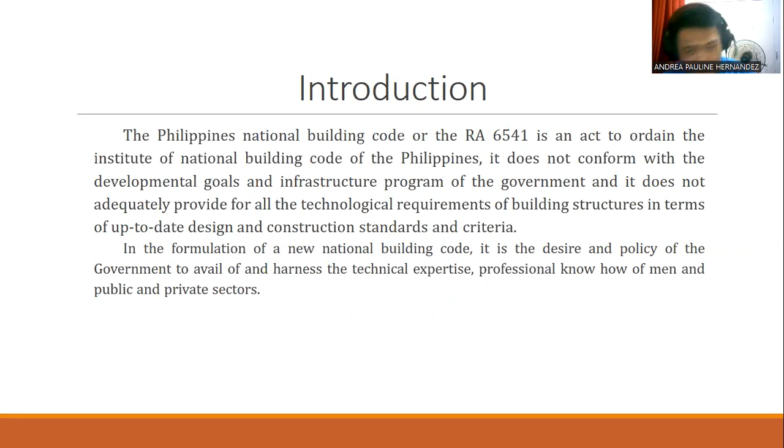First, general provisions on building requirements and site requirements. The general building requirements: all buildings, structures, as well as accessory facilities thereto, shall conform in all respects to the principles of safe construction and must be suited to the purpose for which they are designed.

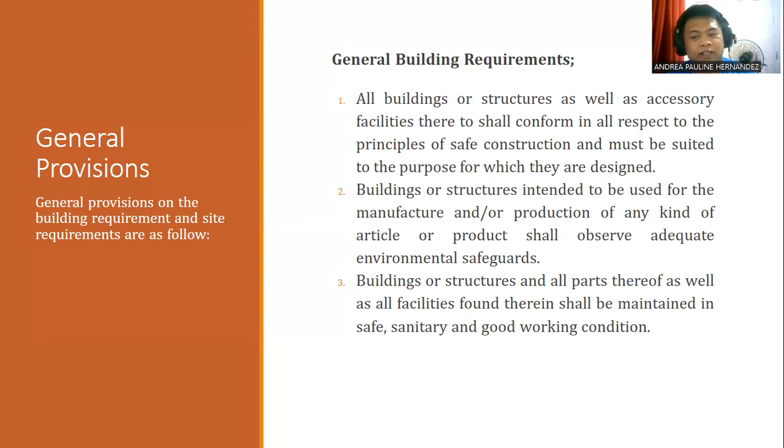Second, buildings or structures intended to be used for the manufacture and production of any kind of article or product shall observe adequate environmental safeguards. Third, buildings or structures, and all parts thereof, as well as all facilities therein, shall be maintained in a safe, sanitary, and good working condition.

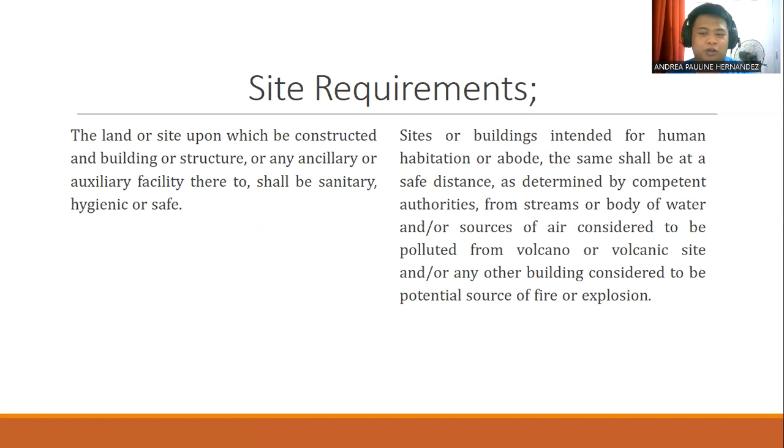Site requirements: the land or site upon which a building or structure, or any ancillary or auxiliary facilities thereto, will be constructed shall be sanitary, hygienic, and safe. Sites or buildings intended for human habitation or abode shall be at a safe distance, as determined by competent authorities, from streams or bodies of water or sources of air considered polluted, from volcanoes or volcanic sites, or from any other building considered a potential source of fire or explosion.

There are 5 types of construction. This will help the learner's understanding of the construction of buildings they see in public, and will also help them identify the materials used in building such infrastructures.

The first one, Type 1, shall be made of pure wood construction. Type 2 shall be wood construction with protective fire resistant materials, and one hour fire resistive throughout, except that permanent non-bearing partitions may use fire-retardant treated wood.

The third type shall be of masonry and wood construction. Structural elements may be any of the materials permitted. Exterior walls shall be of incombustible, fire resistive construction.

Type 4 shall be of steel, iron, concrete, or masonry construction, and walls, ceilings, and permanent partitions shall be of incombustible, fire resistive construction. Type 5 shall be 4-hour fire resistive throughout, and the structural elements shall be of steel, iron, concrete, masonry construction.

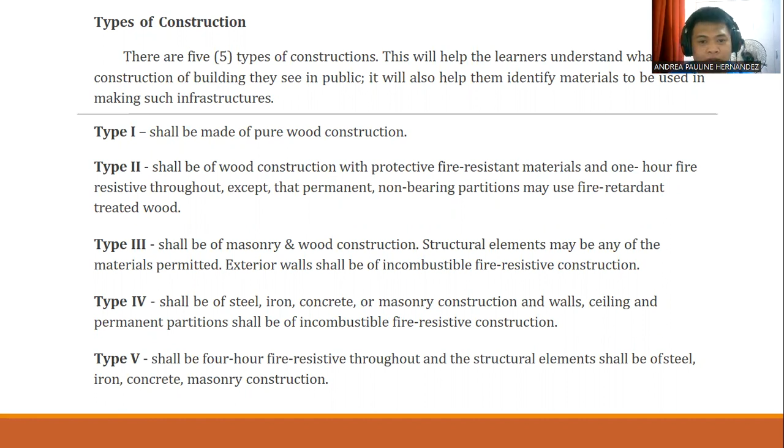Fire resistive requirements of construction. Knowing the fire resistance of different types of building construction will help managers determine what type of building is good for their businesses. This helps by lessening the risk of loss to the business and preventing this as well.

Materials used to construct a building have different fire resistive ratings. This is the degree to which a material can withstand fire, as determined by generally recognized and accepted testing methods. It's also important to understand the fire resistive time period rating, which is to prevent further loss to the business, since it measures the length of time a material can withstand being burned, for example 1 hour, 2 hours, or 4 hours.

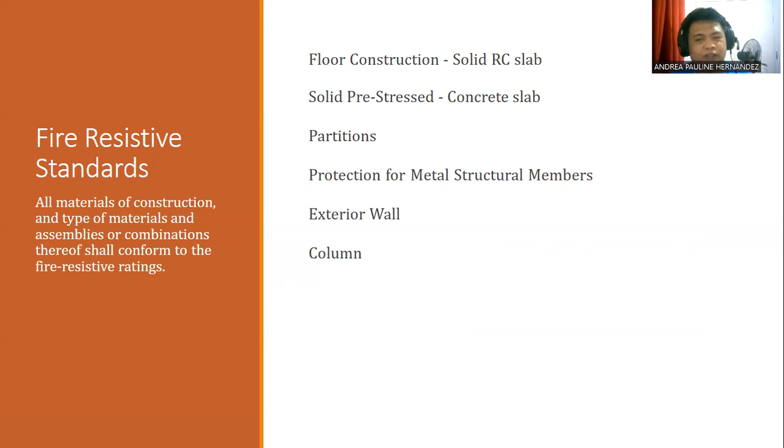Fire resistive standards: all materials of construction and types of materials, and assemblies or combinations thereof, shall conform to the fire resistive ratings. The first is floor construction, or a solid RC slab. The second is solid pre-stressed concrete slab. Then, the partition protection for metal structural members, exterior walls, and columns.

All existing openings on a firewall shall be sealed completely to maintain the fire integrity of the adjoining buildings or structures. There are exemptions based on the usage of the building, especially if it's used for ventilation. These are examples of substandard buildings that have not followed the minimum requirements for firewalls; you may see the difference between the first and second examples.

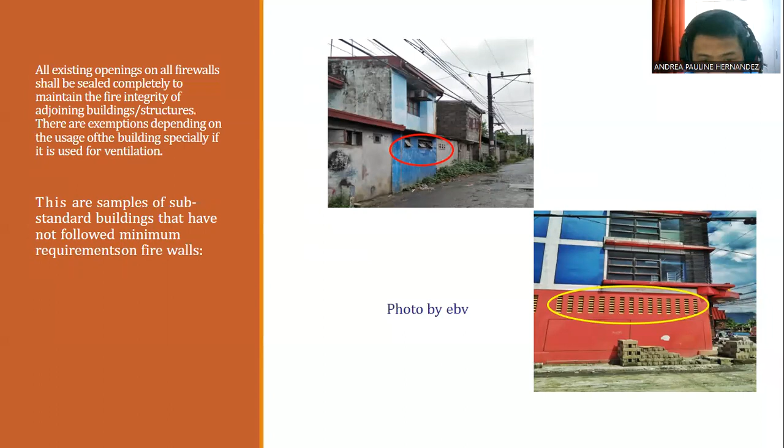Maximum building height: the maximum height and number of stories of a proposed building shall depend upon the character of use or occupancy and the type of construction, considering the following factors.

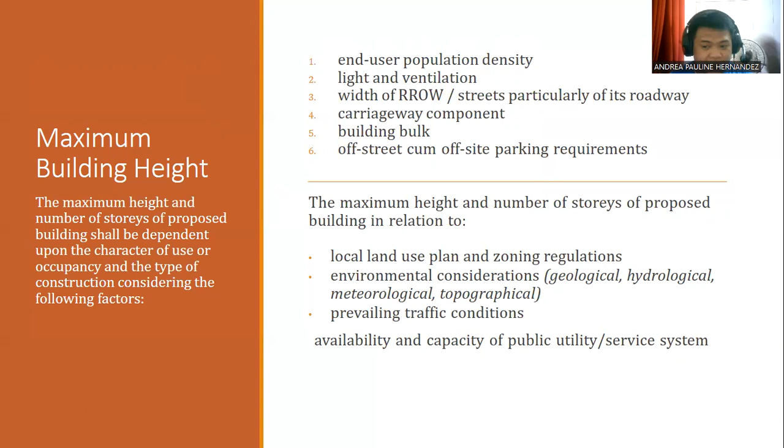First, end-user population density. Second, light and ventilation. Third, width of road right-of-way, streets, particularly roadways, carriageways, component building bulk, and off-street or off-site parking requirements. The maximum height and number of stories of a proposed building also relates to local land use plan zoning regulations, environmental considerations such as geological, hydrological, meteorological, or topographical factors, and lastly, prevailing traffic conditions and the availability and capacity of public utility service systems.

Determining of building heights. Building height limit or BHL is generally measured from the established grade line to the topmost portion of the proposed building or structure. The BHL of any proposed building structure shall only be as allowed under the NBC rule.

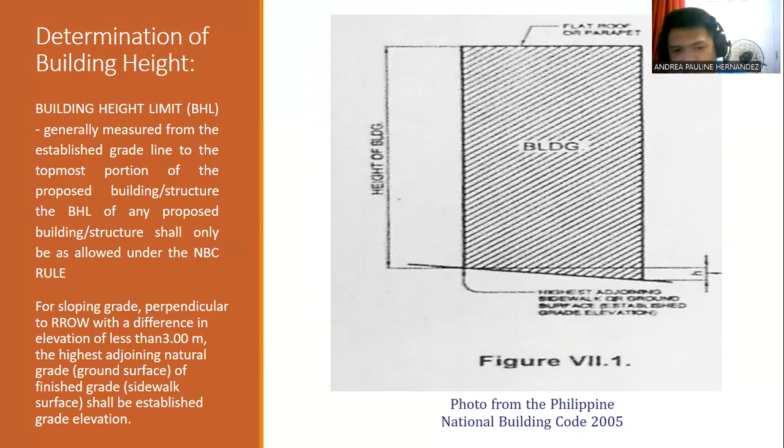For sloping grade perpendicular to the RROW with a difference in elevation of more than 3 meters, the average grade level shall be the established grade elevation. This is different, as you can see in the examples showing different and same levels.

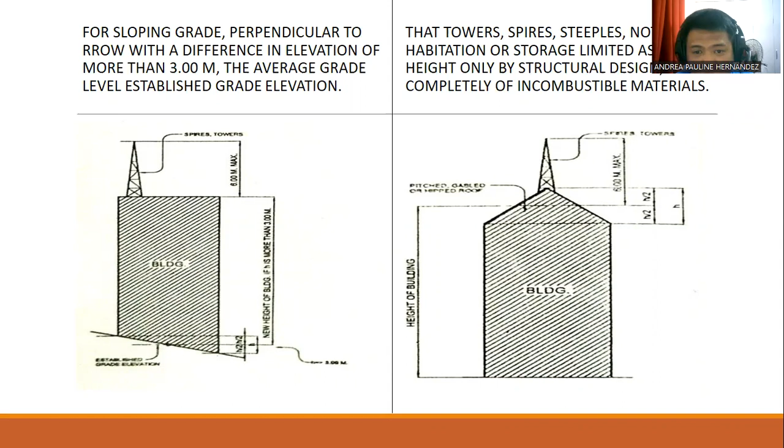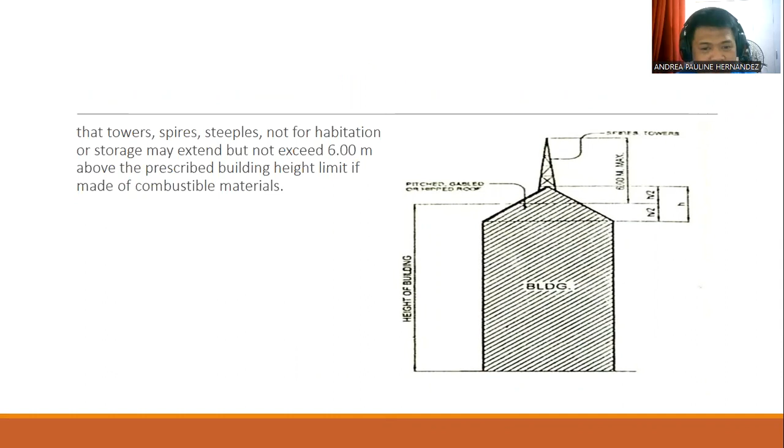The wording can be confusing. The tower's spire, steeple, or similar structure placed not for habitation or storage may extend but not exceed 6 meters above the prescribed building height limit, if made of combustible materials.

The height of proposed buildings or structures shall also be governed by the following RROW-based limitations. If only one RROW services a lot and such is only 6 to 7 meters wide, a BHL of 3 stories or 9 meters maximum shall be observed regardless of use or occupancy, lot size, and dimension, etc.

If only one RROW services a lot and such is only 4 to 5 meters wide, a BHL equivalent to 2.5 stories or 7.5 meters maximum shall be observed.

Fourth, if only one RROW services a lot and such is only 3 meters wide or less, a BHL equivalent to 2 stories or 6 meters maximum shall be observed. Taller buildings are allowed for duly approved high density developments such as a Planned Unit Development or PUD.

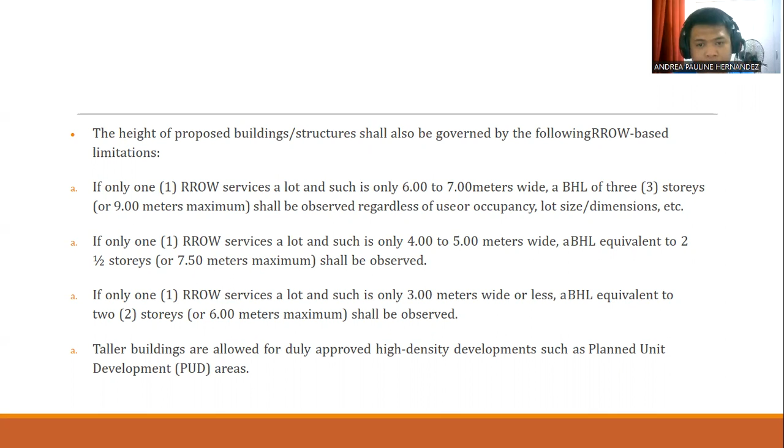The following factors shall also be considered in the determination of building height: A, soil characteristics, lot location in relation to fault lines and earthquake belts, or proximity to volcanoes and other geological conditions; B, hydrological conditions such as the water table at the site and distance to waterways and shorelines.

C, meteorological conditions such as the frequency and intensity of destructive typhoons, monsoons, winds, rains, prevailing wind speed and direction, and relative humidity. The effect of environmental conditions on the building and structures and vice versa, coupled with the effective control of air, noise, and thermal pollution, radiant heat, light, and shadows, etc.

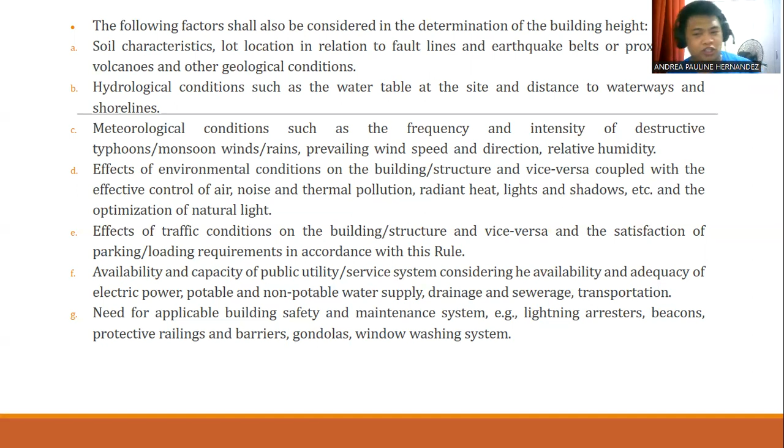And the optimization of natural light, effects of traffic conditions on the building or structure and vice versa, and the satisfaction of parking and loading requirements in accordance with the rule.

Availability and capacity of public utility service systems, considering the availability and adequacy of electric power, potable and non-potable water supply, drainage, sewerage, and transportation.

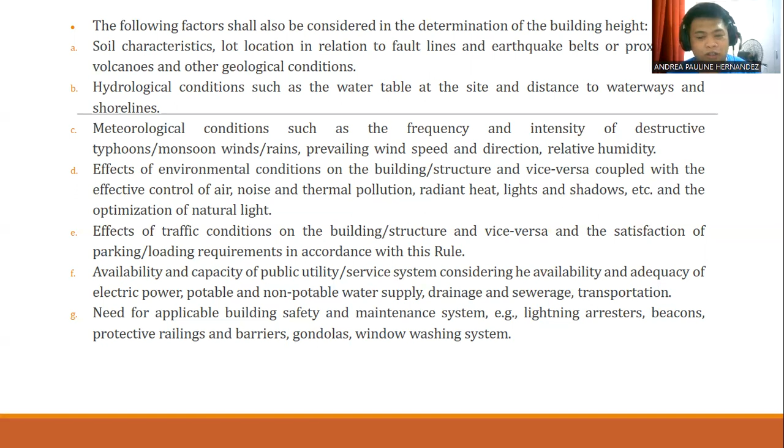And lastly, the need for applicable building safety and maintenance systems: lightning arresters, beacons, protective railings and barriers, gondolas, window washing systems, and parking slot, parking area, and loading or unloading space requirements.

The size of an average automobile or car parking slot must be computed at 2.50 meters by 5 meters for perpendicular or diagonal parking. For additional reference, please check the Philippine National Building Code 2005 Rule, Rule 7, Section 707, 4-b.

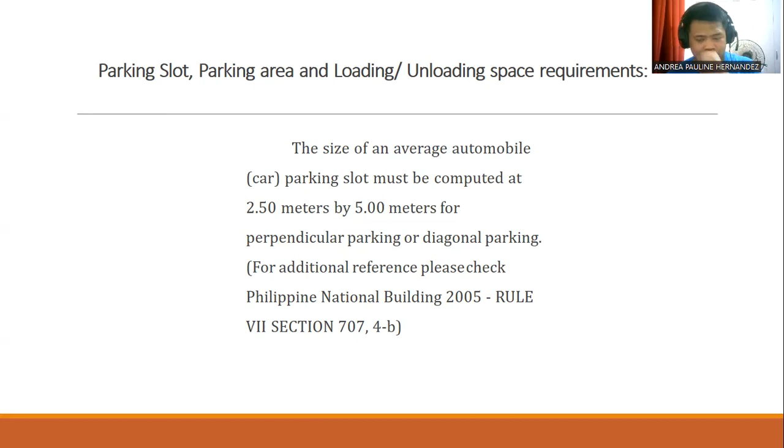Minimum required off-street or on-site parking slot, parking area, and loading and unloading space requirements by allowed use or occupancy. Industrial buildings, factories, manufacturing establishments,

merchandise buildings, warehouses, storage bins, and power and water generation and distribution facilities. For every 1,000 square meters of gross floor area, provide one car slot and one bus slot for every 100 workers. If the number of workers exceeds 200, provide one off-RROW or off-street passenger loading space that can accommodate queued jeepney or shuttle slots.

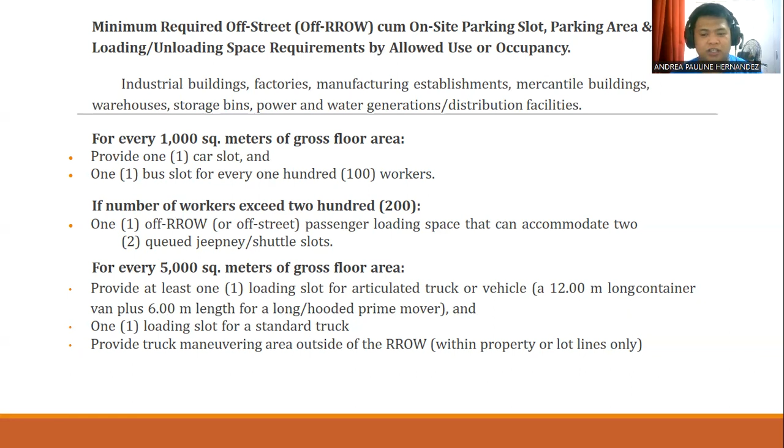For every 5,000 square meters of gross floor area, provide at least one loading slot for an articulated truck or vehicle, a 12-meter long container van plus 6 meters length for a long-hooded prime mover, and one loading slot for a standard truck. Provide truck maneuvering area outside of the RROW, within the property or lot lines only.

To be continued, class, as this topic is a long process. Thank you and God bless.